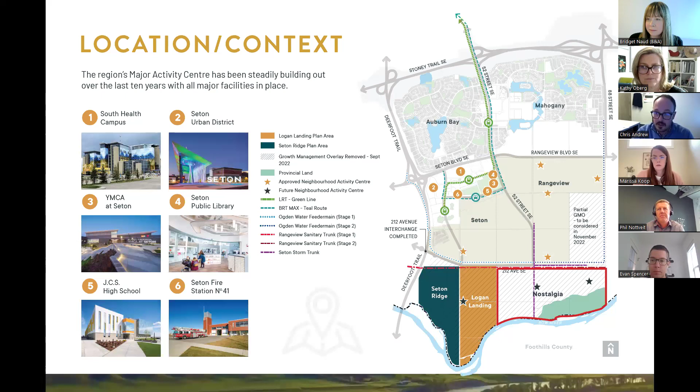With that in mind, these current landowners have diligently reviewed these lands for opportunities for new innovative communities that align with the city policies.

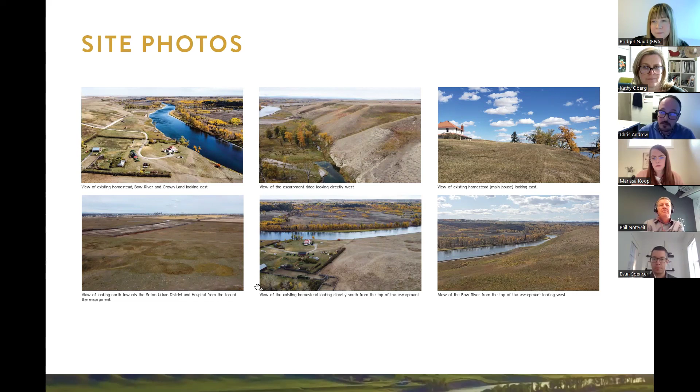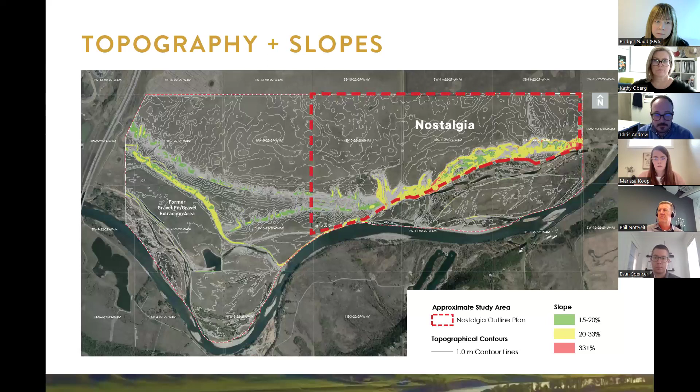As part of the ASP process, the lands were reviewed in a number of ways. Not only were the physical attributes examined and inventoried, but there also exist areas that the province has deemed as floodways, flood fringe, and the meander belt. It is part of the review that all these layers are contained within the mapping to help set the boundaries for future development.

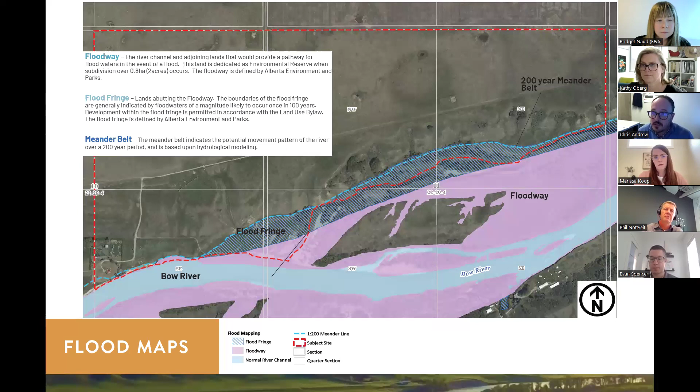As you can see on this map, floodway is identified in purple. That's the no development zone, protected as ER. The blue hatched area is the flood fringe, where development is permitted with additional regulations and restrictions. Then there's the 200-year meander belt, which indicates the potential movement pattern of the river over a 200-year period, based on hydrological modeling.

I'm not going to get into the details of all of these studies. The one thing we want to highlight is that a lot of study goes into plans at varying levels. There is pre-ASP reporting, ASP reporting, supplemental reporting that happens at the request of the city, and then the outline plan reports.

For the outline plan reports, what was completed was a biophysical impact assessment, the geotechnical report and slope stability assessment, a phase 1 environmental site assessment, a soil assessment, a stage master drainage plan, historical resources impact assessment, the historical mitigation that follows that, and then a transportation impact assessment.

All of these studies are reviewed by the city and have to be approved by the city prior to the outline plan being approved.

New urbanism is basically moving back to traditional neighborhood design. It's focused on people, pedestrian orientation, bringing back that classic Main Street, providing opportunities for social interaction amongst people. We haven't really talked about the name, but this is kind of why the name Nostalgia gets its cues from—that focus on traditional neighborhood design.

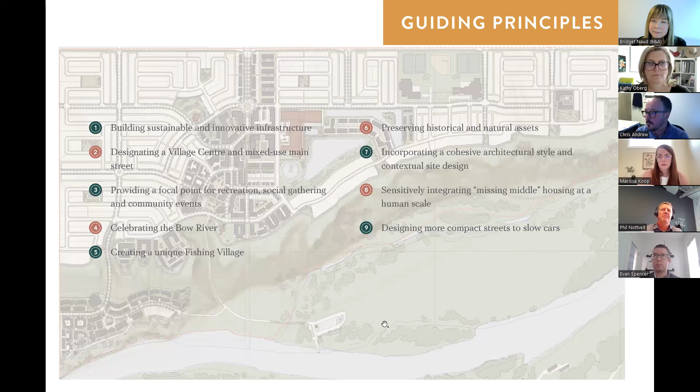Within the village center, there's proposed right now and contemplated a village center school. It would be a private school, but it would complement the proposed public schools just northeast of the town center.

There's a signature town center and town center health and wellness building. That's in the early stages of being planned. But the intent here is to really reinforce that guiding principle of health and wellness, have a center that complements the village center and creates a hub for the community.

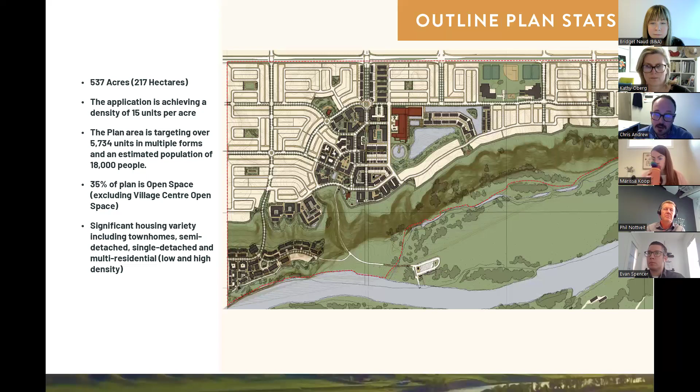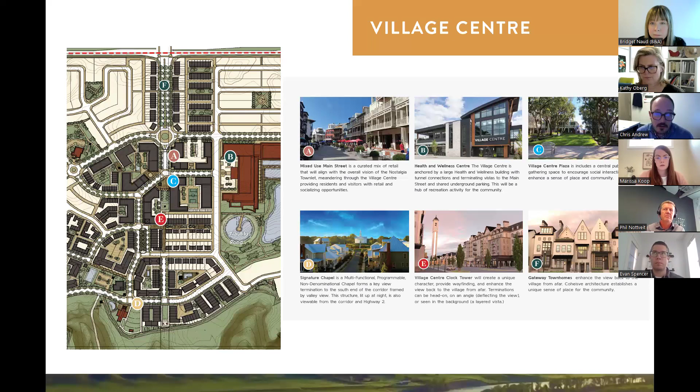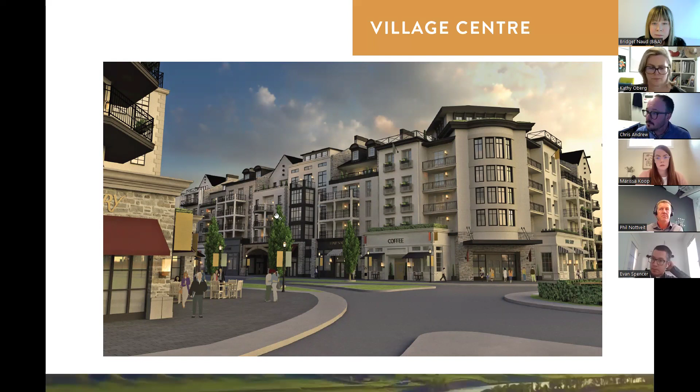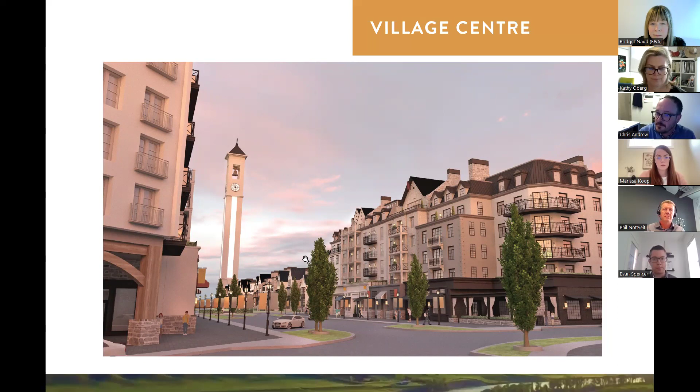Moving down into the fishing village, another exciting and very unique feature of this plan. This is contemplated to have a hotel, a pedestrian-oriented network of streets, and multi-residential type housing to support this as basically a secondary village center.

Excuse me. These initial concepts have contemplated a Nordic spa up against the escarpment, and some slope adaptive townhomes as we move throughout the plan area.

This also has the Bow River Green Corridor, connecting along the south boundary of the fishing village, providing good connection for pedestrians and cyclists. As I said earlier at the ASP, this connects into Logan Landing and the Seton Ridge plan as well.

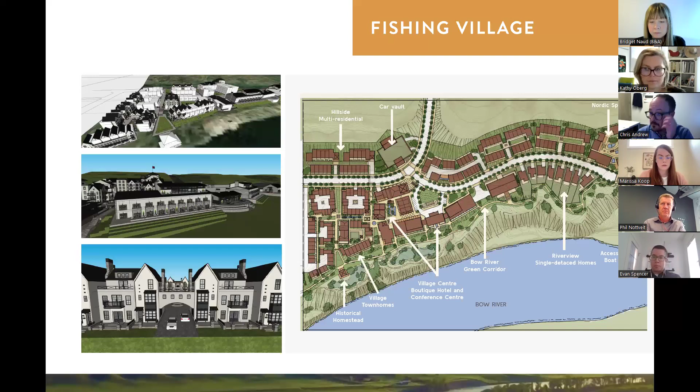These are some of the built form examples. I already went through some of these with the precedents, but this is the wide shallow Mews precedent, the gateway brick townhomes as I've already showed you, and multi-residential, which is the reference point of Westman Village.

These are the canal-oriented townhomes, getting some gentle density along the canal.

This is a laned home precedent, so again you can have a variety of frontages and lot widths. This is an example of slope adaptive multi-residential precedents.

Some fishing village brick townhome precedents. The village center townhomes have more of a unique feel when you're in that village center, and then some drive under, tuck under townhome use.

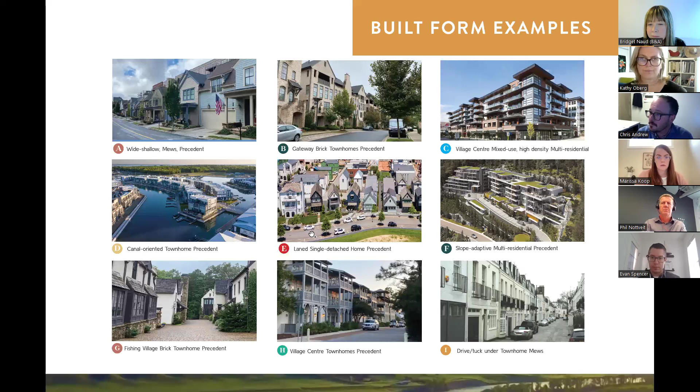We're not going to go through all the parks. What we'll just highlight here is the aim of the parks plan has been to distribute parks throughout the plan area to provide park access to all of the plan area within a short walk. As I mentioned earlier, 35% of this open space is through these park spaces, the ER and the PUL.

And we do have landscape designs for all of these park spaces. I don't have them on hand, but if you have any further questions, we can probably share those with you.

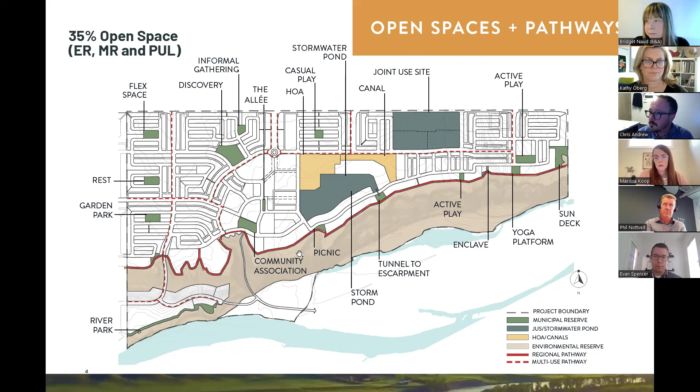Another thing to highlight here is the innovation within this plan. I'm not sure if Cam or anyone from Jayman joined the call, so I won't get into the details, but some things contemplated within this plan include a very significant emphasis on net zero, solar, and geo-exchange.

The net zero homes are available for offer within this community. The solar, correct me if I'm wrong, but I think it's mandatory solar panels on every residential home and the multi. And a geo-exchange process is contemplated for all the multi-residential and commercial buildings.

Again, I'm not the expert in any of the technical aspects of those, so if you have questions, someone from my team or we can get you in contact with Jayman to get more information. But this reiterates the commitment to the first guiding principle, which is to focus on mitigations to climate change, focusing on alternative forms of energy to basically run these communities.

That takes us to questions. I don't know if anybody from our team wanted to jump in or add anything you feel I maybe missed. If not, we can open up to discussion.

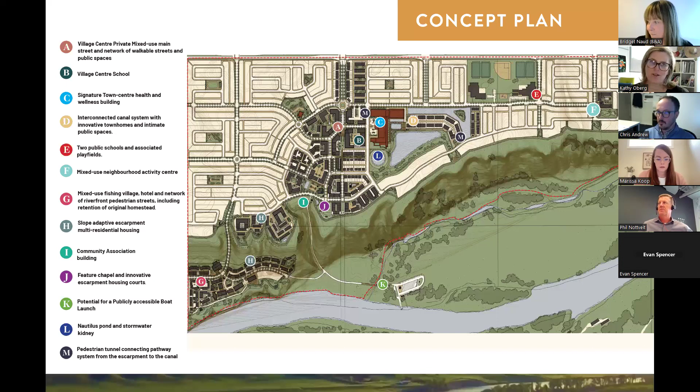Certainly with our survey and the ability to reach out, we can answer questions at any point in time. We know you're getting a lot of information all at once, which we can understand. It sometimes takes a bit to digest. I think having this presentation available to the public to review afterward means we don't stop after this event.

We keep it open. We're also very cognizant that it's the first week of spring break for some people, and we want to make sure we hear from you if you or your neighbors or friends have additional questions. So please don't hesitate. We're going to leave it open for, I think it's a couple weeks, Bridget, to receive feedback and questions, and we can get back to you as well. Or tell your neighbors and friends about us, and they can watch the presentation.